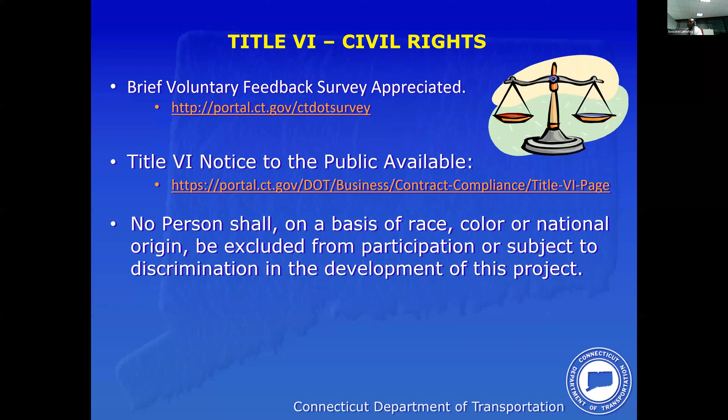The project is managed by the Department of Transportation, and the management team is as follows. Bartholomew Sweeney is the manager of bridges, Bao K. Chun is the principal engineer, and Swate Lamote, myself, is the project manager. Bracco Frimpong is the project engineer, and coordination and all inquiries may be channeled through the project engineer.

Also, the department has contracted a local consulting firm, Close, Jensen and Miller, with the acronym CJM. Tom Ryan is the project manager, and John Miller is the project engineer for CJM, and they will be in charge of the design of this project. Assisting them is the sub-consultant Hardesty and Hanover, with the acronym H&H. Stephen Holm is the project manager, and Brian Kinsley is the project engineer.

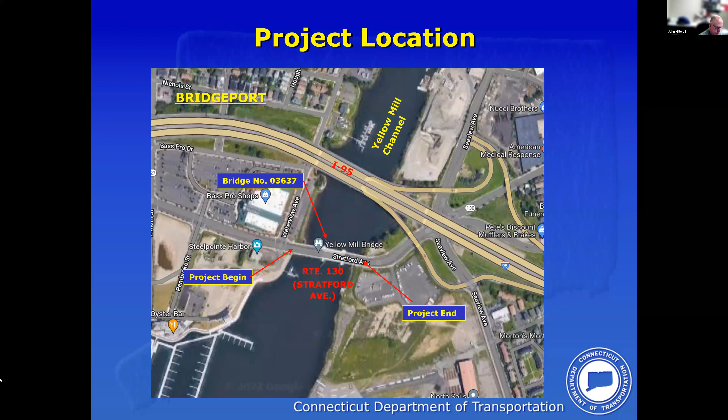Our project goals for this project are to rehabilitate the bridge to ensure continued safe and reliable use for the traveling public. In doing so, we plan to bring the bridge to a state of good repair. Currently, its rating is considered fair, and we'll speak in more detail about those descriptions later in the presentation. The mechanical and electrical upgrades are important to this bridge. We'll bring it to state-of-the-art in this project. We will extend the service life of the bridge, and this will promote and enhance area commerce and traffic.

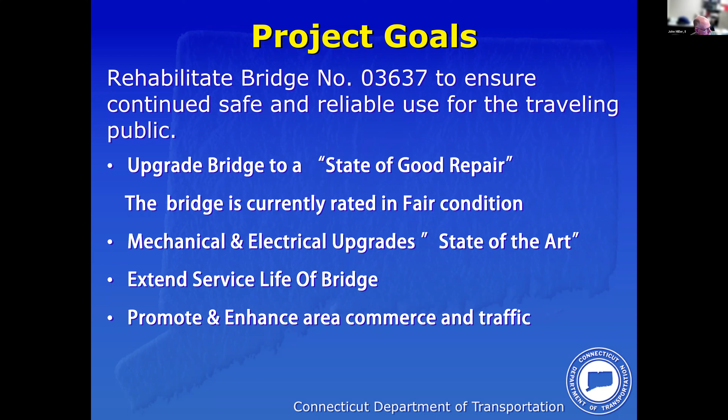The purpose and need is to address the operational, safety, and preventative maintenance concerns, and to upgrade the structural integrity of the entire bridge to a state of good repair, extending its service life.

Structurally, the requirements are to improve the access and general safety, repair deteriorated structural steel, and improve the balance of these bascule bridges.

Electrically, we will redo the control system, the motor control center, and the generator, since they're all at or near the end of their useful life.

Mechanical work is involved. It involves the drive motors, reducers, brakes. And as I said, Brian Kinsley of Hardesty and Hanover will speak in more detail about those, including the jaw and diaphragm span locks, which are difficult to align and maintain.

Architectural improvements will be made for operator visibility and to improve the control house safety and functionality. And the fender systems at the navigation channel are in need of some improvements for safety and maintenance.

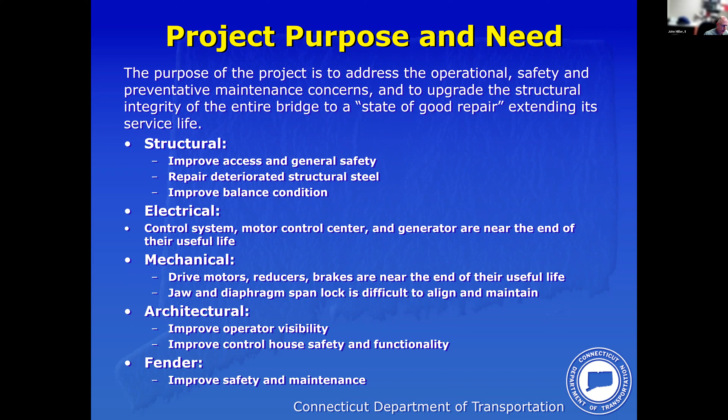Thanks, John. As John said, my name is Brian Kinsley with Hardesty Hanover, one of the sub-consultants working on designing and repairing this structure. The bridge was originally constructed in 1926 with a major structural, mechanical, and electrical rehab in 1998. I was lucky enough to be part of the 2016 storm armoring and resilience upgrades that were made in response to the bridge being hit pretty hard by a couple of the more recent superstorms, including Sandy.

And now we're entering a new phase and a rehabilitation study.

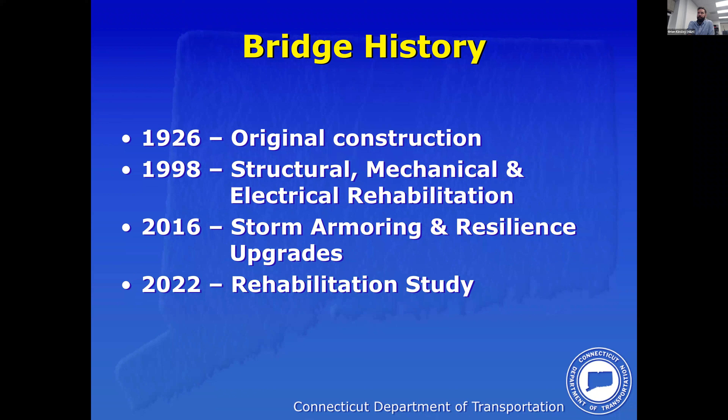So the existing structure is a 4-span bridge, a total of 340 feet long. And the main span is the 4-leaf rolling bascule with 122 feet pinion to pinion. The approach spans are pre-stressed concrete box beams. And the bridge is overall 81.5 feet wide with a 60-foot roadway and 9-foot-9 sidewalks on both sides.

The navigable channel is 100 feet wide. This bridge carries US Route 130, Stratford Avenue, over the Yellow Mill Channel with 2 lanes in each direction, seeing an average of about 13,600 vehicles per day. And the draw span opens on 24-hour notice, so it is not regularly manned. You just need to call ahead anytime that you want an opening.

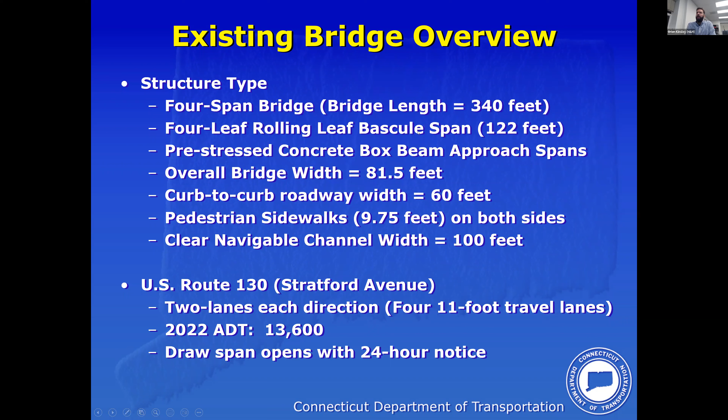This is the existing plan and elevation of the bridge. We've got the main span with the fender system right in the middle, and you can see as the span opens, as the leaves open up, they also roll backwards to give a 100-foot clear channel at the end of the bridges.

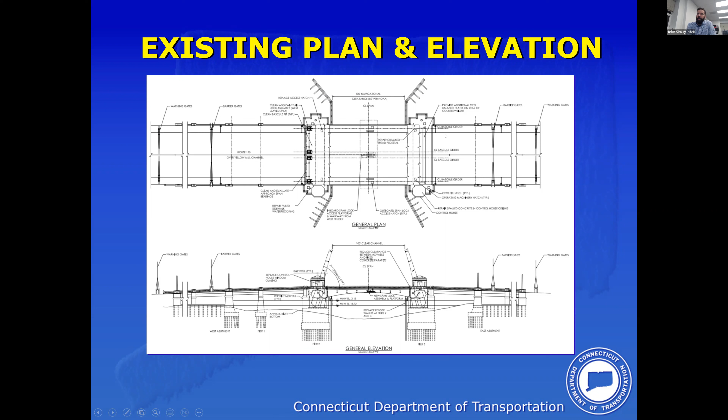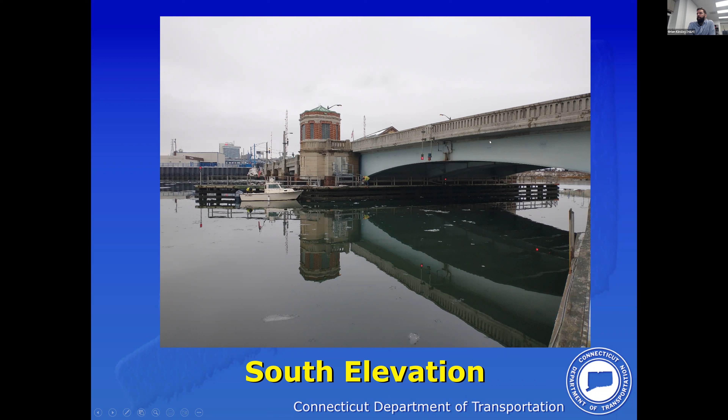This is the north elevation. Again, the big landmark around here is usually the Bass Pro Shop. We can see in a normal tidal situation, the fender system exposed a few feet, which is what I was out there standing on when we took these photos.

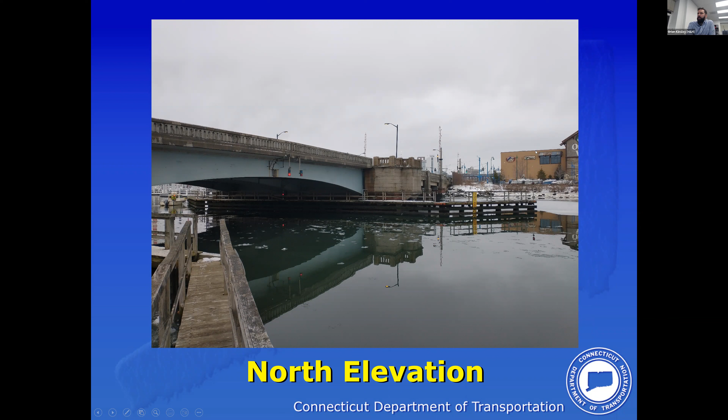This is the west elevation, looking in the same general direction when the bridge is open. You can see the underside, the structural steel, the stringers, floor beams, and girders that make up the structural components of the bridge. And again, you can see the fender system and the access into the bascule pit.

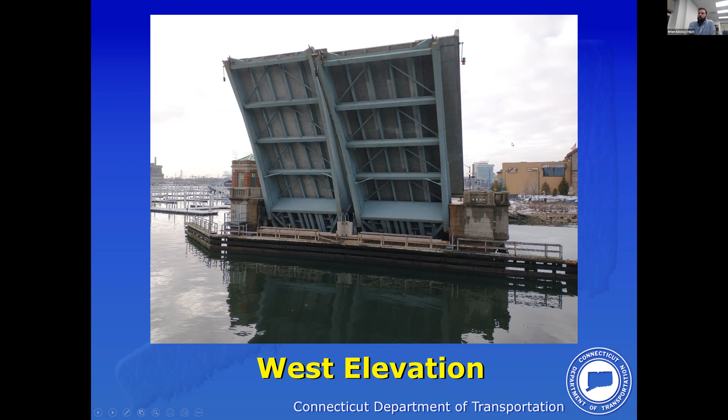The existing bridge condition is not in bad condition. The deck rates a 7, the superstructure a 5, substructure a 5, mechanical system is a 6, the electrical is adequate, and the fender system is right now a 4. This is all based on the department's rating conditions that go from a scale of 1 to 9, a 9 being brand new, excellent condition.

And what we want to do is make sure that this bridge is at least a 5, hopefully a 6 rating, and make sure that we don't have anything that presents itself as poor any longer.

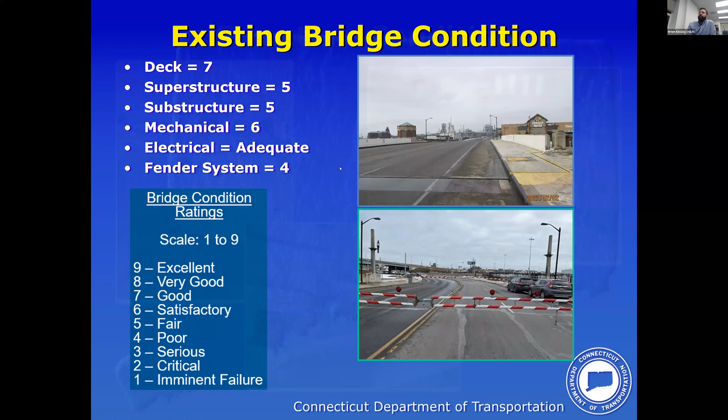Structurally, anybody who's crossed the bridge may recognize the top two photos. We've got a shot looking west where we can see that the existing movable parapet has a large gap between the fixed parapet. Just to the right, we can see failing coating on the sidewalk adjacent to one of the control houses. Underneath, we can see a view from the lower floor of one of the control houses, where some of that failed coating may have led to water leaking and concrete spalling on the inside.

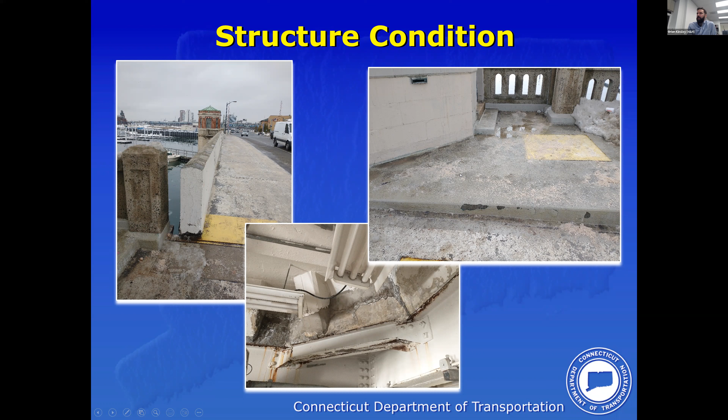On the top left, we've got a shot of the existing jaw and diaphragm closure system that currently locks the leaves in place when the bridge is closed. On the top right, you can see down inside of the bascule pit, which is currently pretty clean and well kept as a result of the storm armoring rehabilitation back in 2016.

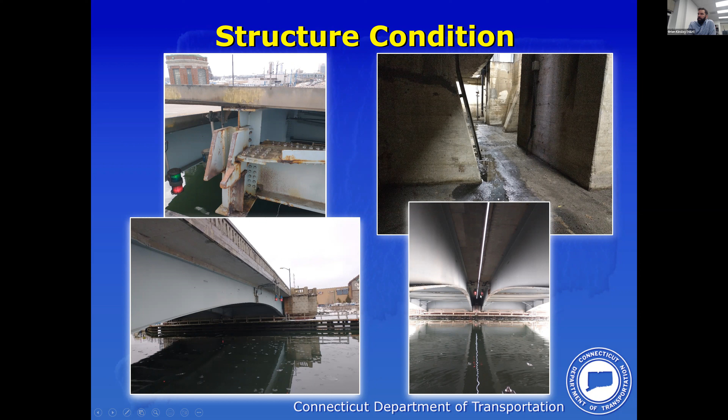Down on the left, you can see looking along the girder. It's a nice clean looking bridge, and underneath you can see right down the middle of the bridge from the fender system right across to the opposite side. You can see the nav lights that you would catch anytime you're traveling in a boat, either underneath or during a bridge opening.

We've got a few shots of some of the mechanical equipment that, as we stated, some of it's nearing the end of its useful life. Top left, we've got the primary gear reducer, brakes, and motors, which we plan on replacing. On the bottom right, we've got the existing rack and pinion, where we have a little bit reduced tooth to tip clearance, which we'd like to rectify to make for smoother operation of the structure.

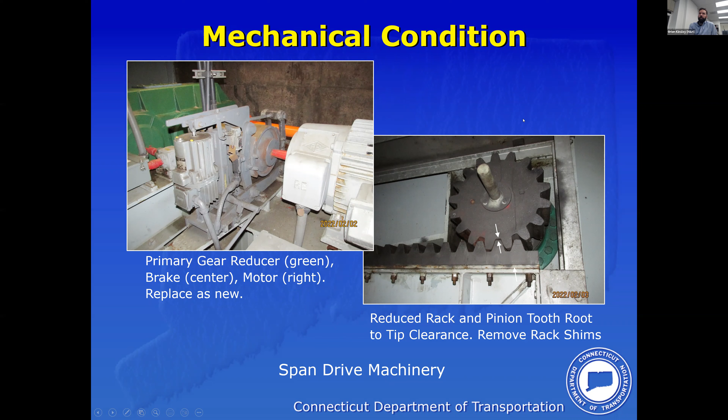Again, one of the main focuses of this project is to remove the existing jaw and diaphragm closure system and locking system at the toe of this bridge. This type of system, while it does involve no moving parts, is particularly difficult for bridge operators to align the spans with the current electrical system. So we'd like to replace this with a lock bar type motor actuated span lock, which is something we've used successfully on plenty of other structures.

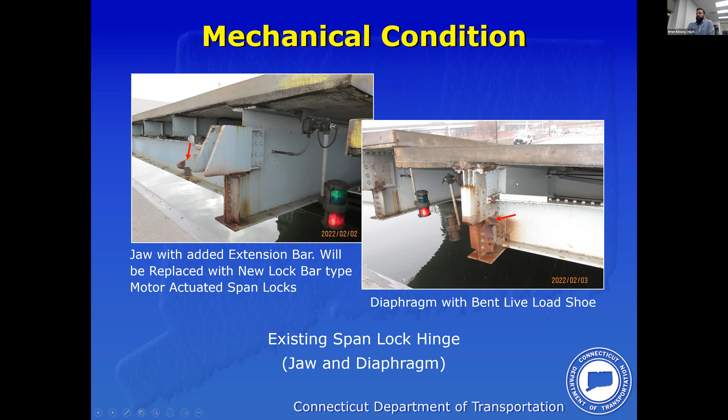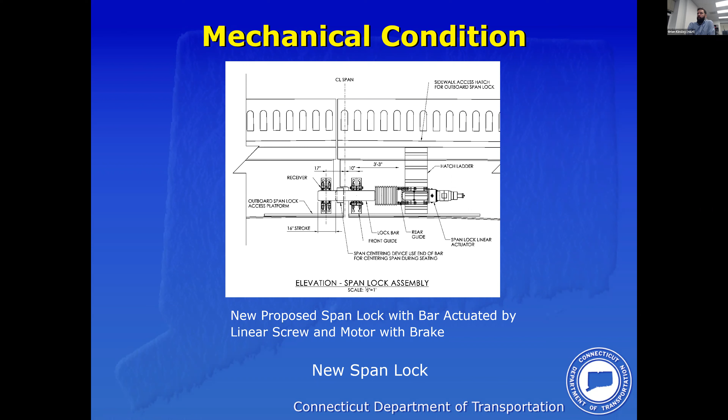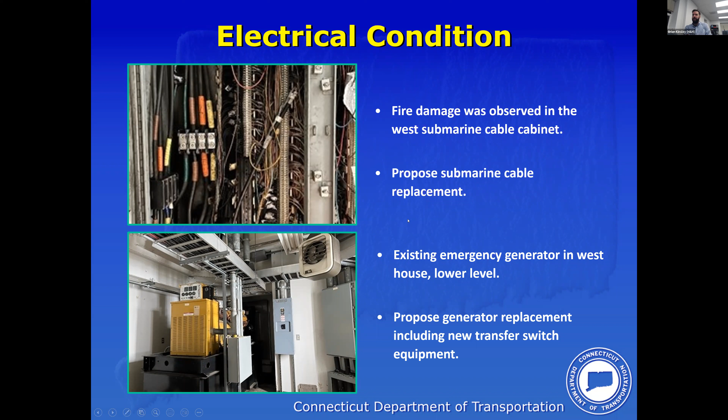Electrically, we found some fire damage that was observed in one of the sub-cable cabinets, which may have been caused by a lightning strike. As part of that and the age of the system, we're suggesting to replace the sub cables. On the bottom left, you can see the existing generator system, which hasn't been used all that much, but again it's entering the end of its useful lifespan, and we propose to replace it and provide new transfer switch equipment.

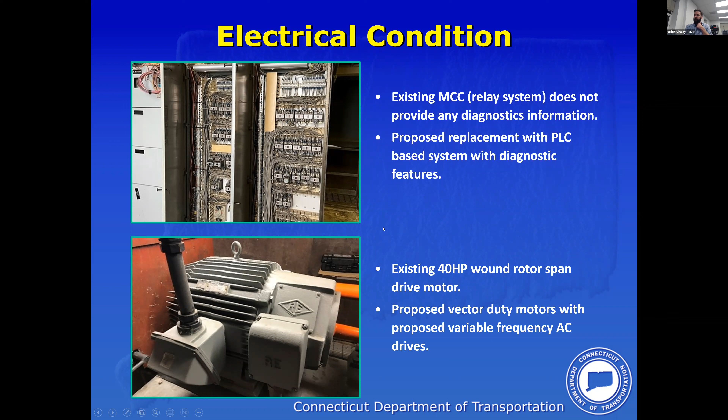The existing MCC relay system doesn't provide diagnostic information, and we'd like to provide a system that does offer diagnostic features so we could better troubleshoot and run all the systems on the structure. We'd also propose replacing the existing span drive motors with variable frequency AC drives.

Another thing you might have noticed while walking or driving across the span is that the windows in the control house have very low visibility because of the age and material they're made out of, the polycarbonate. It's important that our bridge tenders and operators have a full 360-degree view while operating the structure, to make sure it's safe in all directions, that there are no pedestrians on the structure, and so they can better see everything going on the bridge as well as underneath while operating.

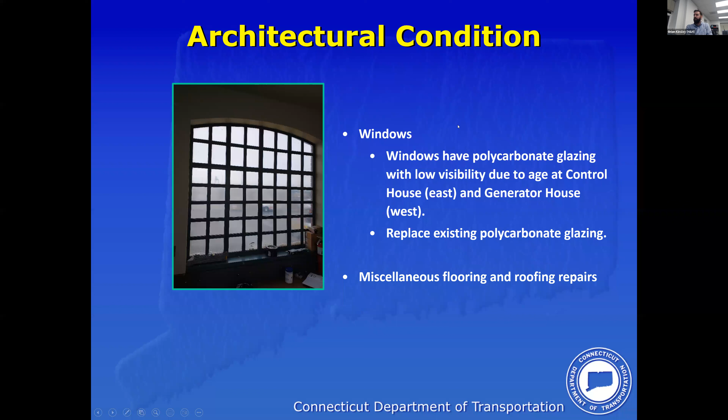There are also some miscellaneous flooring and roofing repairs, including a leak in the roof and some floor tiles that are coming up, which we would propose to replace.

The existing fender is in reasonable condition. There are section losses in the horizontal timber walers that we see here. Some of them are covered in barnacles and algae, and some of them are outright missing.

We haven't noticed any marine borer activity in the vertical or battered timber pile supports, and the zinc sheets over the pile tops are in good condition.

So we're looking at making most of our repairs on the horizontal timber walers and the access walkways and railings. We also want to provide new tide markers.

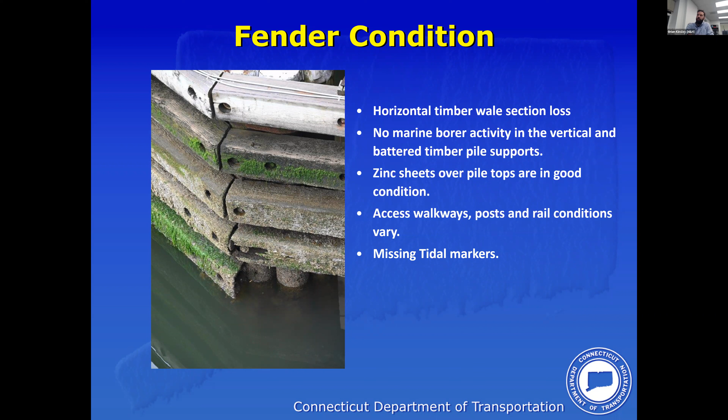A summary of the structural work we're proposing: the big one would be improved machinery and maintenance access. We'd like to provide access platforms for the new proposed span lock assemblies and even additional counterweight for span balance.

We do have some structural steel repairs on the stringer webs immediately over the counterweight, and there will be concrete spall repairs along the parapet and within the control house lower level.

We also mentioned the architectural work, including window glazing replacement on the control house and other miscellaneous control house repairs.

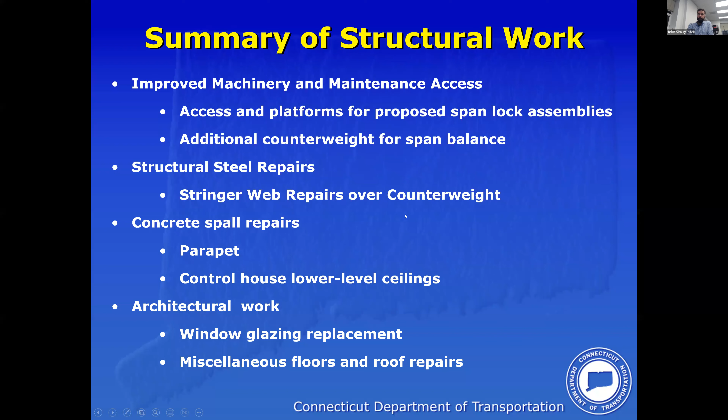Mechanically, the biggest thing here is that we want to replace the span lock assemblies in order to make sure that we can run this bridge more effectively and more consistently, and that it makes it a lot easier for future bridge operators.

We're also looking to replace the reducers, aux motors, clutch assemblies, brakes, and we want to shim the rear live load shoes, tail locks, bumper blocks, and secondary reducers.

We were also asked during this research phase to replace the pit diaphragm pumps and piping, replace the oil water separator, backup generator, and to replace traffic gates and heat pump to the control house.

All this work will require additional cleaning and painting in and around the areas that we're going to be working.

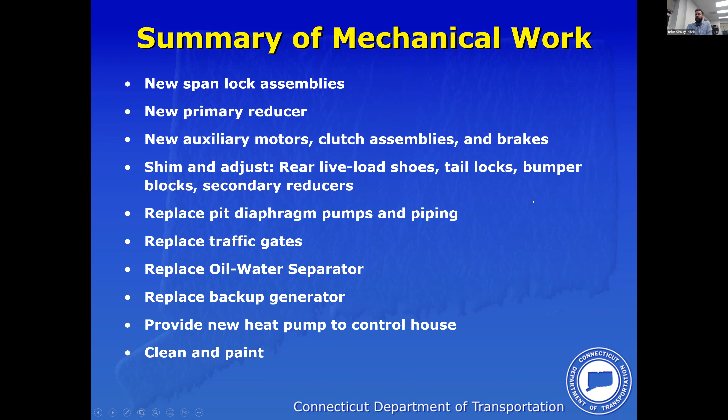Electrically, while we're replacing all these things mechanically, we are going to go in and install brake heaters, modify the interlocks, replace the barrier gates and the motor control systems, replace the main motors and transfer switches, and also furnish new wireless PLC communications and television system so that we can monitor the structure remotely.

We'd like to put new space heaters in the houses to keep those operators a little bit more comfortable, and replace the roadway lighting and upgrade all of the existing lights to LED.

One of the big items is that we'd like to replace the sub cables on the project, which are the cables that go from one movable pier to the other, and control all the communications and power between the two, so that the whole bridge works as a single system.

At this point... no, I'm going to cover this one. Excuse me, I'm going to go back to it.

As far as the fender work goes, like we discussed, we're going to retain the existing pile support system, replace the deteriorated wales, replace the walkways, posts, and railings as needed, and replace the missing tide markers.

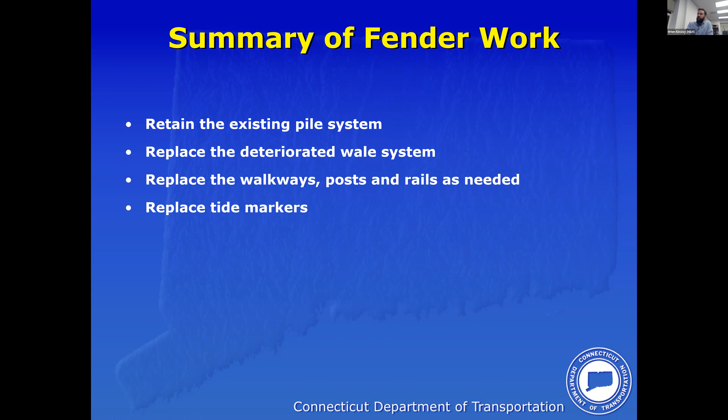Thank you, Brian. The traffic maintenance scheme that we developed is a two construction stage plan. Each stage would be 4 to 6 months in duration per stage.

We would shift traffic to one span while maintaining the other span, while the other span is closed and we're working on it. We'll maintain one lane in each direction throughout most activities, with only short-term detours during major activities. During those short-term detours, we expect to be able to maintain a pedestrian walkway on one side of the bridge throughout.

The traffic maintenance will require a temporary bolted metal beam rail in the center of the movable bridge span.

We feel we can maintain traffic throughout the construction, and we note that marine users are required to give 24-hour notice for an opening, and the contractor will require close coordination with that to ensure that we provide marine traffic openings in accordance with that standard.

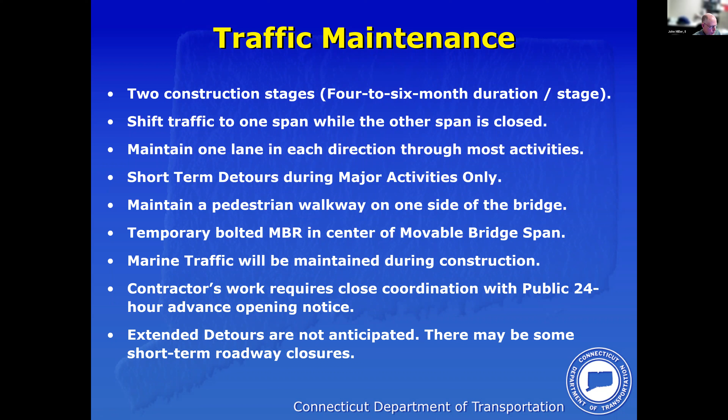Extended detours are not anticipated, and again, there may be some short-term roadway closures. Next slide, please.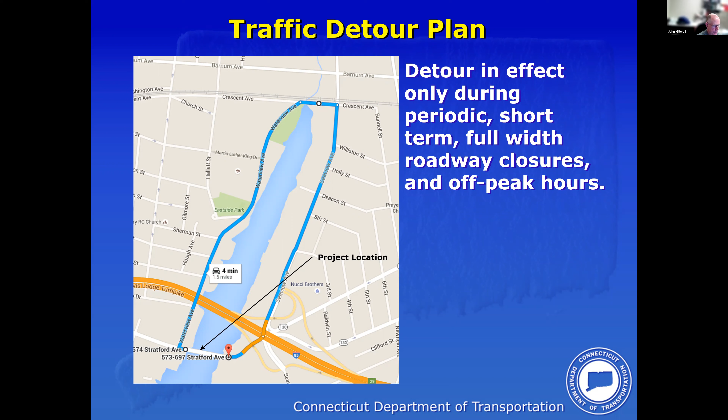Bicycle and pedestrian considerations are shared goals that we have with the city and the East End neighborhood and the department. We've had some sit-downs with city officials, and we are going to work together with the city to incorporate city plans for a future bikeway across the bridge. The department is interested in secure and reliable mobility options to the traveling public to and from the city.

We are aware of a Metro COG study that has looked at the East End neighborhood and ways to better represent them in transportation and economic interests, incorporating motorists, pedestrians, and cyclists as best possible. Our project, while it's outside the limits of that study and isn't part of it, is something we're aware of. Because we have consistent goals, we want to be sure we're incorporating what we can into our project.

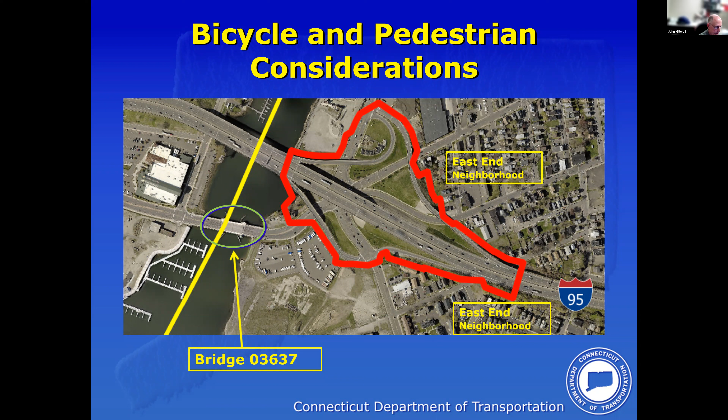To that extent, we are working with the city on pedestrian traffic. We have good sidewalks on both sides of the bridge already. For a bikeway, Route 130 is a main connector for the city's bikeway plans, and we will work with them to gain better, more reliable access. Last, there are some lighting improvements within the limits of our bridge that we will incorporate. All of that we feel is very consistent with the Metro COG study.

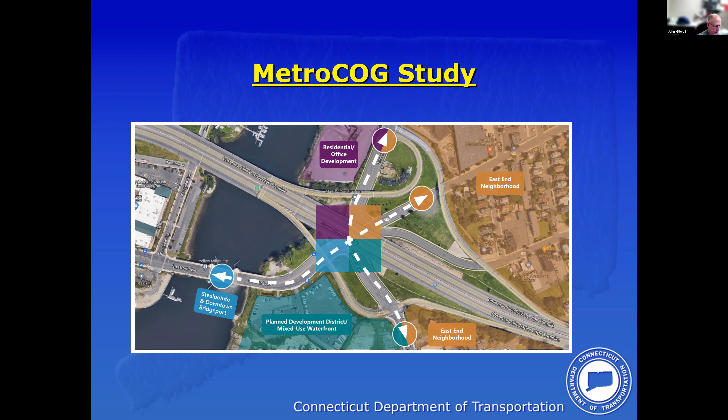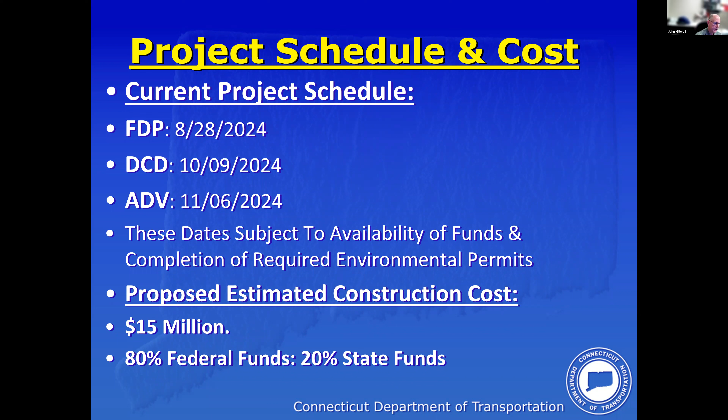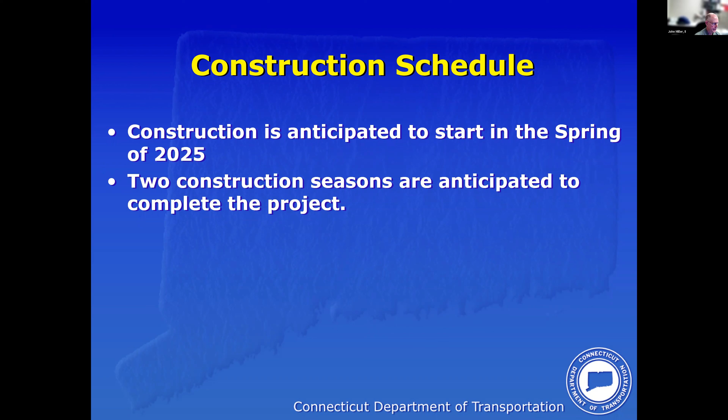The schedule is anticipated to start actual construction in the spring of 2025, with 2 construction seasons anticipated to complete the project.

Cost estimates: you can see the breakdowns here, about 3.2 million in mechanical, 2.6 in electrical, 2.5 in structural. Construction costs, including maintenance and protection of traffic, mobilization, minor items, inflation, incidentals, and construction staking, are about 6.1, for a total cost of $14.6 million.

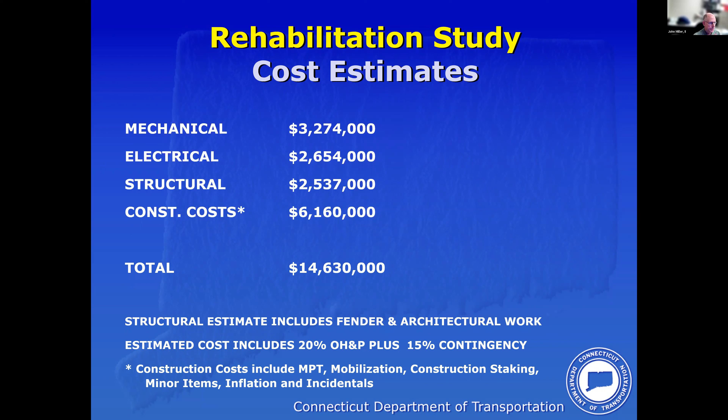The permitting we envision includes an Office of Long Island Sound Structures Dredging and Fill permit, a flood management and general certification, a Section 401 water quality certification, an Army Corps of Engineers pre-construction notification, and because we are over the Coast Guard navigation channel, we anticipate a letter of approval from them.